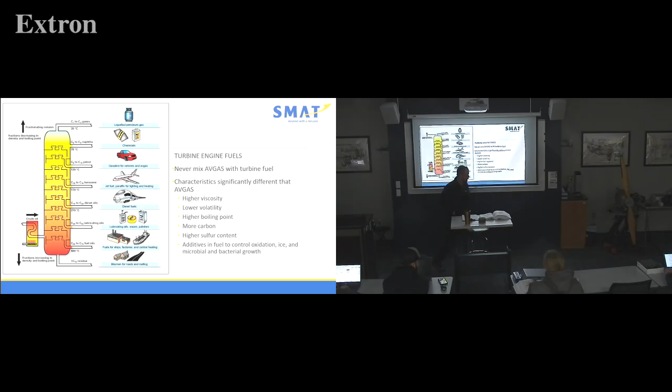We're talking about fuels. Fuels, okay? I showed this chart on Tuesday. That seems like a week ago, doesn't it? Showed this chart. It's in your book on page 14-8. Turbine fuels. Turbine fuel has a higher or lower BTUs than avgas. Higher, per volume. Right, okay. So, when we're looking at this, what's the bottom of the chart?

What's the real key difference here? Volatility. Say what? Volatility. Volatility. Okay, we're getting to a more pure kerosene here. Okay, we have more additives in diesel fuels, that's why it stinks. And then Jet A just smells so sweet, right? So we get Jet A here, and then we're getting to avgas, and then finally unleaded gasoline and other chemicals.

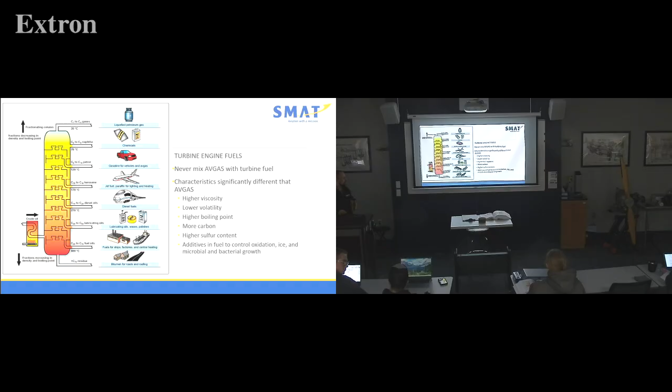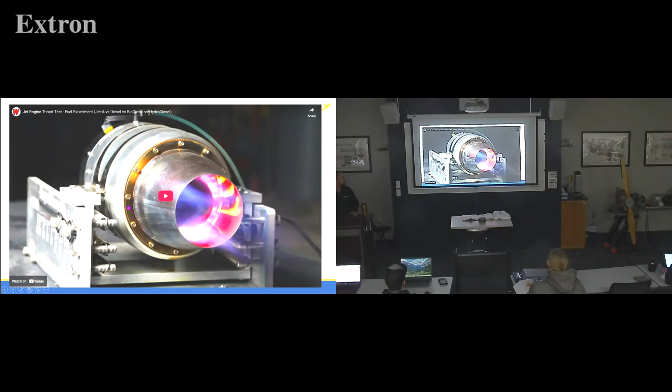All right, let's see what jet fuel does. I really enjoy this video. Oh, we don't get it now. Oh, thank you so much. Sign in to confirm you're not a bot. It's funny, it plays on my computer.

Anybody else not able to access the maintenance publication library today? Not working. I'm gonna access the network. The manuals? Yeah, I can use it today. Okay.

I'm testing this jet engine on 4 different fuels: jet fuel, diesel, biodiesel, and hydrodiesel to see which one makes the most power. I'm using this jet engine in some upcoming episodes and doing some experimentation. This thing sounds absolutely insane, so I had to share my testing with everybody. First thing I have to do: build a jet dyno.

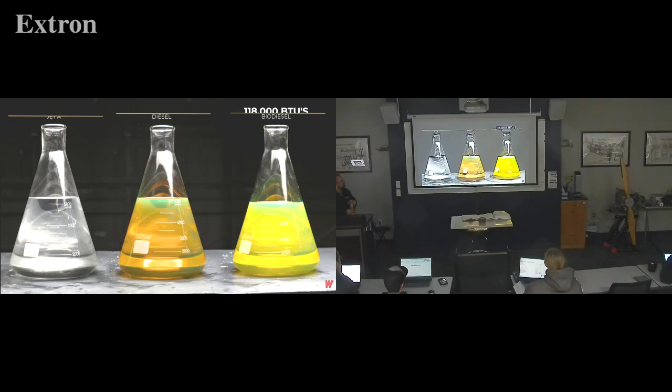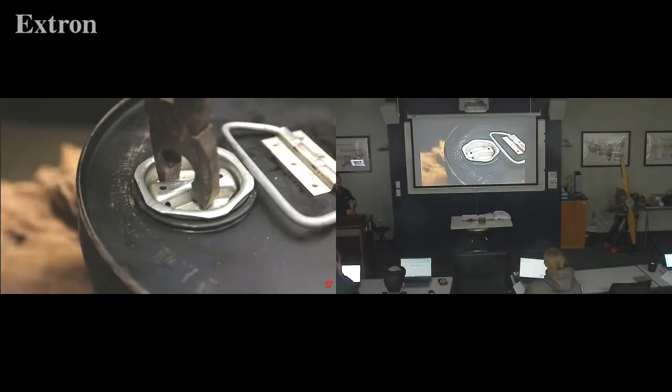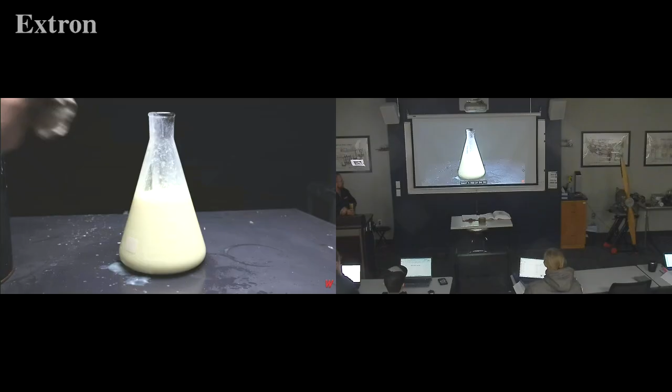Oh no, well, I could have got... there's definitely ice in there. That's really interesting. All right, let me try this again. Here we go, all in. Boom, 5,000 on the dot.

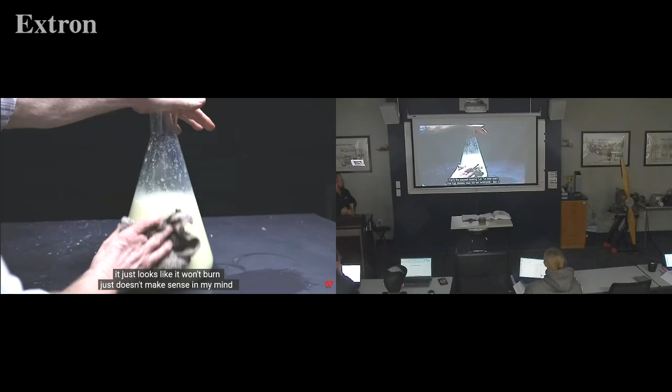That's the coolest looking fuel I've ever seen. This fuel always trips me out whenever I see it. It just looks like it won't burn, just doesn't make sense in my mind. There's actually ice, but I did get the summer version of the diesel. I'm glad I did because now this proves that 20% water... that's really cool. My hydrodiesel has been sitting outside for over a year.

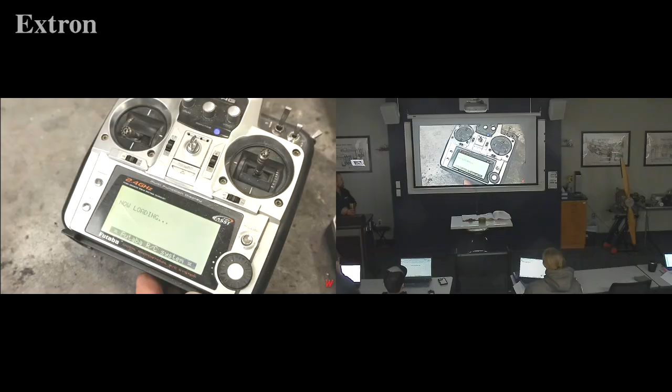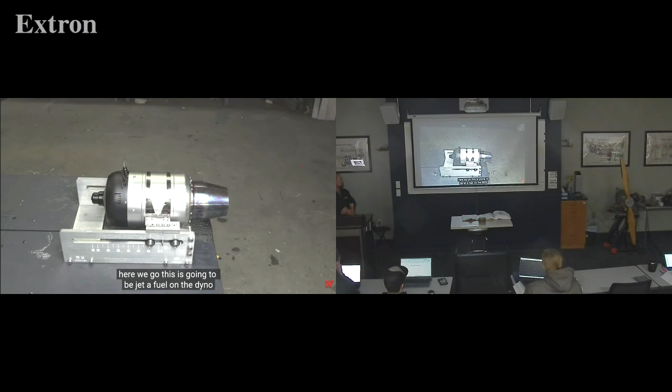I got it all defrosted, got all my fuels set up, ready to go. The only thing I have left to do is add oil to all of my fuels for my turbine. Okay, I got everything all set up: the ECU, the fuel pump, and the jet engine. Here we go. This is going to be Jet A fuel on the dyno.

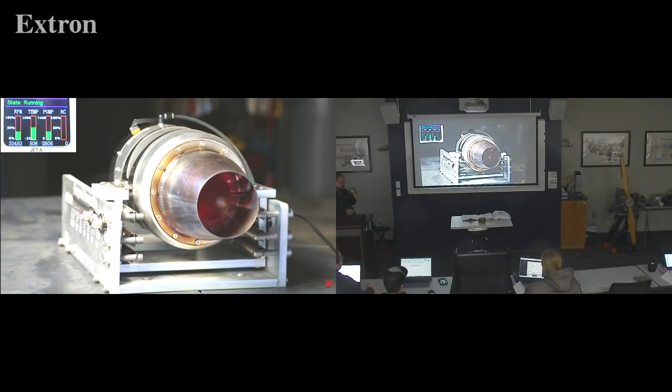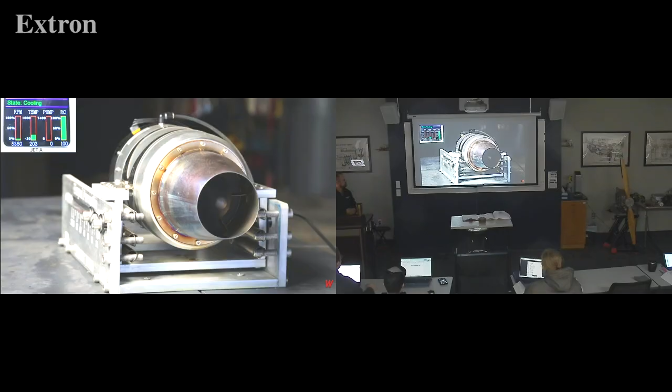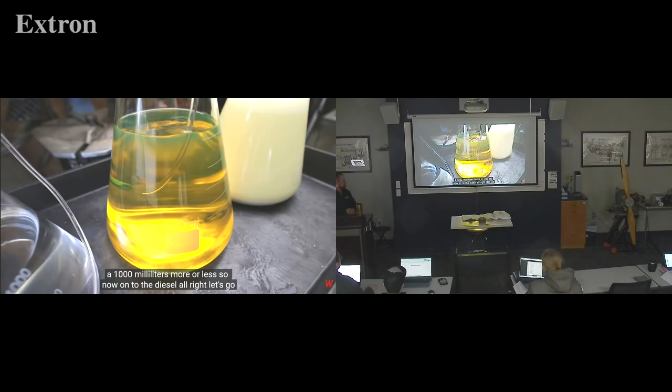All right, so that was it for the jet fuel. It used about 1,000 milliliters, more or less. So now on to the diesel. All right, let's go. Here goes the jet dyno run on diesel fuel this time. Here we go.

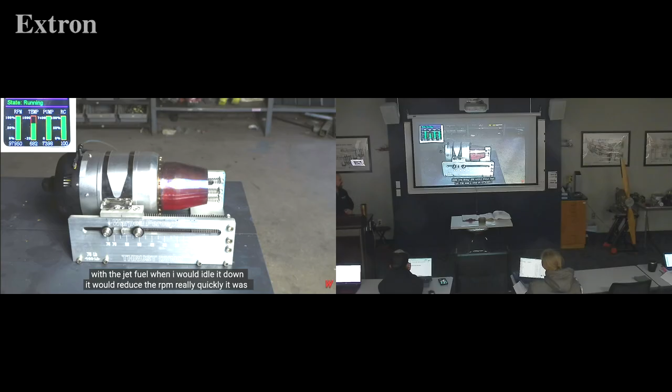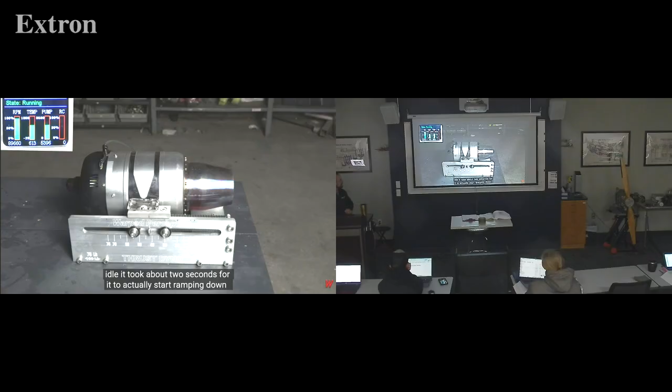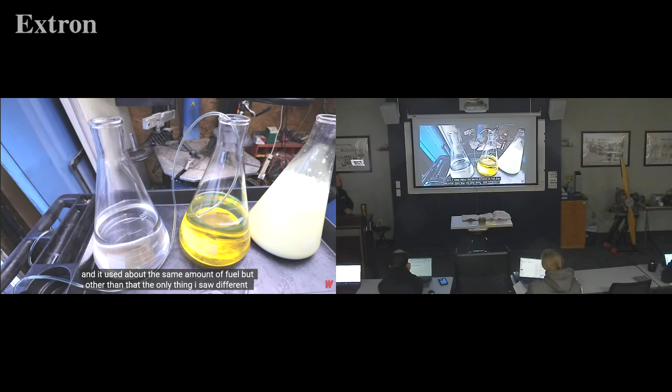Okay, one thing I did notice about that run that was a little bit different: with the jet fuel, when I idled it down, it would reduce the RPM really quickly, pretty responsive. With the diesel fuel, I noticed when I went from full throttle to idle, it took about 2 seconds for it to actually start ramping down. I don't know why that is, maybe the fuel has a different consistency or different energy content. It used about the same amount of fuel, but other than that, the only thing I saw different was how it smelled and looked when I shut the engine off.

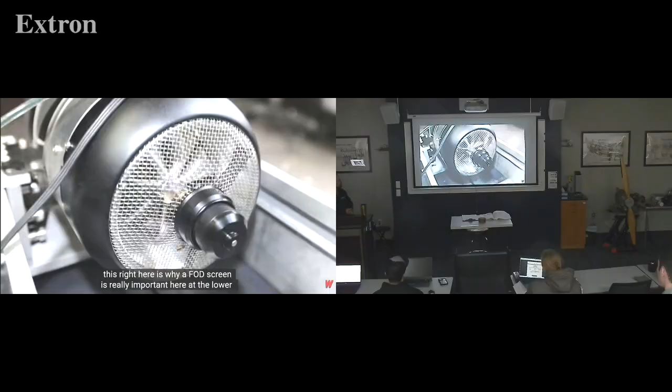Let's move on to the biodiesel. Man, this sucker's heavy, I'm scared I'm gonna drop it. This right here is why a FOD screen is really important at these lower altitudes. Here we go again, this time biodiesel.

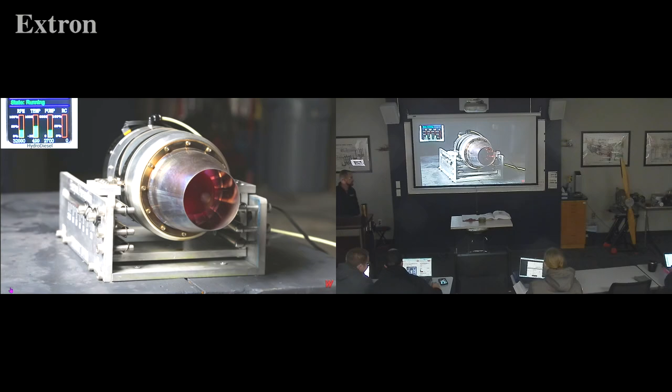All right, takeaways. Takeaways that you had from different types of fuel—as our modern generation, we're obviously always trying to come up with better ways to burn fuel.

Takeaways? More effective ways, yep. What we got works. Well, what did you notice about it? The EJ performed very well. In what ways? As far as thrust. Okay, better thrust? Cooler.

Yeah, it was a lot cooler, even on startups. What does that mean long-term?

So, a recip engine would get roughly 1,700 to 2,200 hours between overhauls. Jet engines are running almost 4,000, with the ability to extend if you have electronic monitoring.

Basically, you're recording data every startup on your temps, and as long as your temps stay below certain numbers, I've seen them go over 5,000 hours—not on an air tractor, but on things like Pilatuses—as long as you can present that your temperatures are staying down.

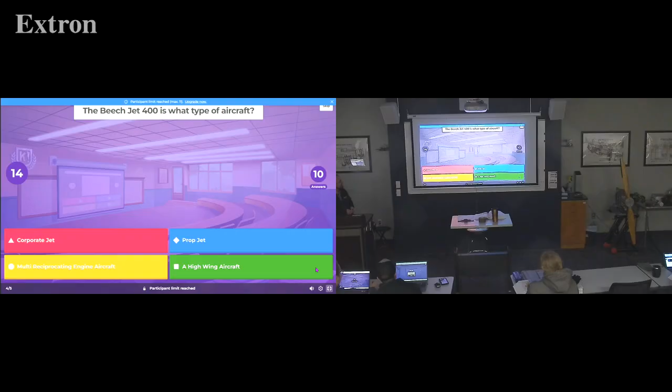Alright, when would someone need to hand prop an aircraft? Not the first one. It's circle. Okay, some of you are like, man, that logic was way off. 400 is what type of aircraft? Okay, hey good job, Christian, back there, really good job on that one. You scared me a second ago. Alright, last question, Carter moved up again.

Alright, last question, everybody ready? Okay, hey sorry, I didn't realize because it's not an actual quiz, it's just a practice, that they only limited us to 10, but we'll fix that for tomorrow. Alright, so let's do the little dance, everybody ready to watch the little, what do they call it, the podium? That's right, podium. Alright, Jedi Master over there, is that you? Jedi, okay good. Alright, T-Swift, still a little weird.

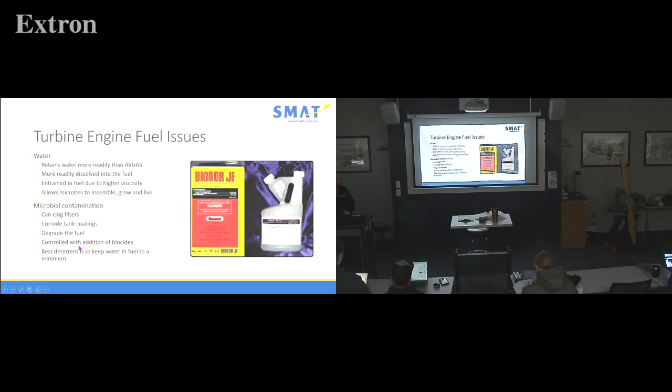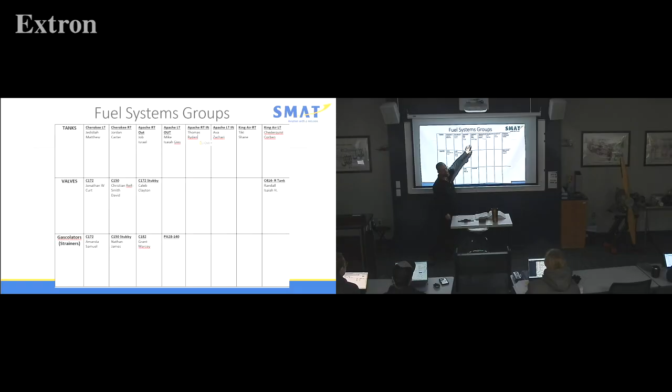Okay, what does that mean? The King Air is going to take the longest. Okay, it's just going to take longer. But I don't have a King Air for everyone to hop in on. Okay, and then I don't have an Apache for everyone to hop in on.

Okay, the way the lab reads is that you just remove a fuel tank, you test it, and reinstall it. Okay, the way that we test fuel tanks is actually in the back of AC 43.13-2B. Anybody ever looked in the back of AC 43.13? You have two sections, 1B and 2B. The back of it will tell you that you're supposed to pressurize a fuel tank to about 2 psi, no more than 2 psi.

Everybody got me? Okay, so what we're going to do is, did I get everybody's name? Did I leave somebody out? Why do I have a blank? I guess I have an extra if one of these groups finish first. That must be what I'm doing here. All right, I'll come back to this group in just a minute, but I need to hop into fuel tank types real quick. All right, everybody got their group?

All right, so let's talk about gravity fuel feed system, or feed fuel system. Gravity feed fuel system tank spaces must be interconnected if the engine is fed from more than one tank at a time. If you're not going to understand some of this, just wait till the pictures. For those of you who are like myself that are visual learners, just hold on for one slide, okay? Just take this in, try to understand it, and then when you see the picture, it'll make more sense.

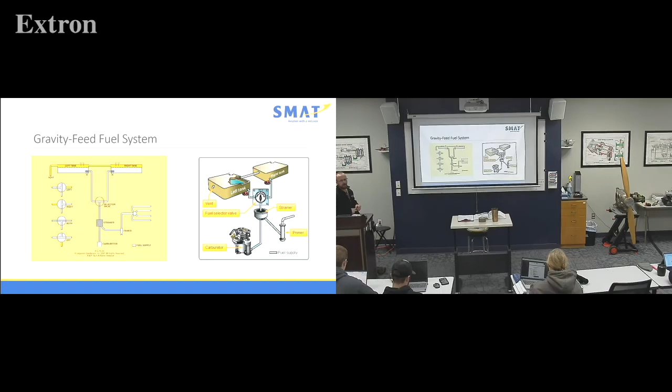Go back one slide. Tanks must be interconnected if engine is fed from more than 1 tank at a time. And that's if they're trying to cross feed a different tank.

So this is for not only multi-engines, like you were saying earlier, but also for when we just select the fuel valve selector to both. Yeah, and I think the good example was the old bird we have outside, the 414, that didn't do that - where they just ran it, you didn't have it interconnected. It was connected from this tank all the way to this tank, so you had to pump it here and then come back, and all of us stand around like, what were they thinking?

In 1971, they said I had to pump it to the tip tank from the locker tank - right behind the engine, the nacelle. Pump it to the tip tank, then pump it from the tip tank to a crossfeed pump all the way over to the right engine. I'm already halfway there, just pump it to the right engine. And that's what they did in 1979 with the 414A.

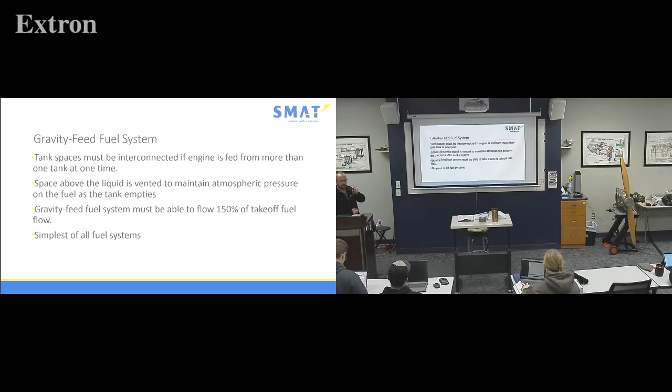I'm failing to understand why the importance of interconnecting the tanks is, like. We'll get there, we'll get taught that. Let's hop in, let's finish fuel feed, and then we'll get to the pump system.

Makes sense, okay? All right, here is our blazing fast Cessna 150. Whoa, Mach speed of what? 90 knots, or 100 if you're going straight down. Okay, so here's our 150.

Pretty common to have a gravity fuel-fed system. So if it was state-of-the-art in 1965, the Cessna 150 was designed to last how many years? 15 is correct, yep, you get the award for today. We'll ask Case to give you a little ice cream voucher or something.

Okay, so the way they originally designed it - if you see these little weird straws on top of the wings, those are actually certified for that aircraft, even though they look like they were built somewhere else. I was going to say Alabama, but...

So the fuel tanks originally had little bitty spouts here, so as you're going through it, it would create pressure into the tank and could vent out that way. Then they were cross-vented here, and then it comes down to a little fuel selector.

The original Cessna 150s only had left or right - there was no 'both' setting like a Piper. So if one tank got plugged, you should switch over to the other. Eventually they came to where you could go to 'both,' but if you get into a 150, don't be surprised to see just a left or a right.

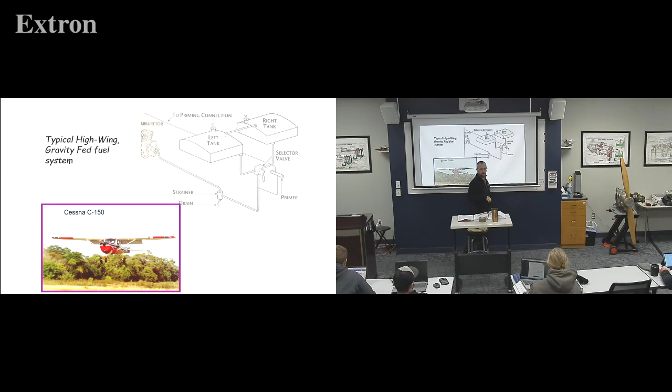We're talking about you, the pilot or mechanic, deciding to turn the fuel selector on and start the engine. Do you know how much fuel's flowing? No. It better flow in order to run, and it's engineered to run at a certain rate, minimum of 150%. All right, I'm stopping there, I'm not going to talk about fuel burn yet.

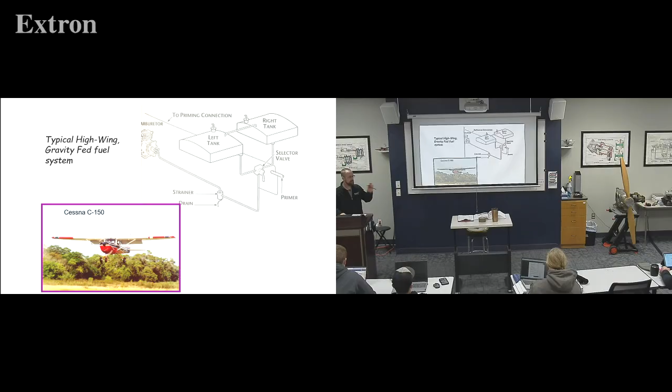Okay, all right, what does it look like on our modern aircraft? Please take a gander at this, okay? You need to pay attention, especially those who are going to be doing labs in my class.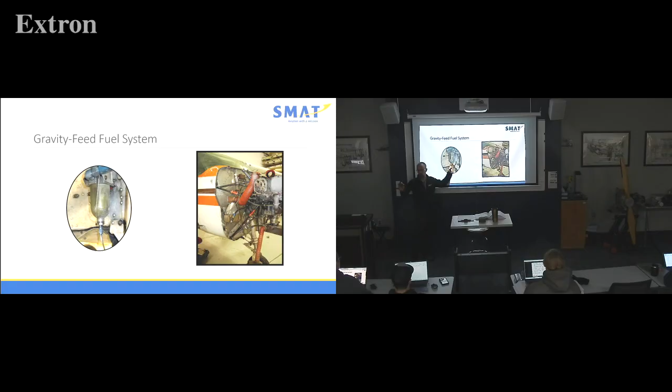Is there a drain on the bowl so we can pull a strainer inside and get fuel out? Yeah, so you want to make sure the fuel selector's off - that's what the service manual will tell you. Make sure fuel's off, then drain the bowl into a little cup - not much fuel anyway. Drain the fuel out, loosen that, and it'll come off. Just make sure the fuel selector is off.

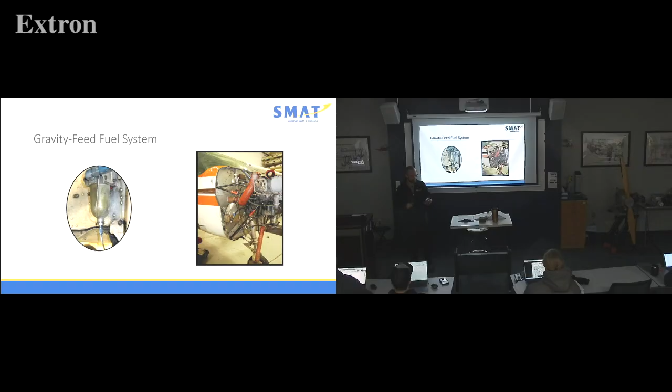All right, pump feed fuel system. So a couple of highlights here - give me an aircraft that has a pump feed fuel system. Piper Cherokee. Any others? Archer, DC-3, Aztec does too, correct? So a very common low wing setup.

Why low wings? You had one? You feel like I shortchanged you? No, I was just entertained by a comment. Oh, okay.

With the high wing, you have the fuel up high and it can go down by gravity. With low wing, the nice ability is someone at my height can fill the fuel system very quickly and inspect it without having to crawl on top of the wing. But now we've got to get the fuel from here up to the engine, so they'll use a pump system.

Typically it'll look more complicated than this on the aircraft, but your wings have the fuel tanks in them. They run to a fuel selector, then down to a strainer - sometimes it'll run to a strainer and then over to the fuel selector. Some of the newer aircraft even have a sump at the fuel selector.

Why would that be such a good practice to add, a good standard? So water doesn't get in there and corrode it - that's right, you don't want it to eat away at your fuel selector. I'm in favor of having a sump at the fuel selector, I like that. So if you're working on an aircraft, does the 172S have that, a sump at the selector?

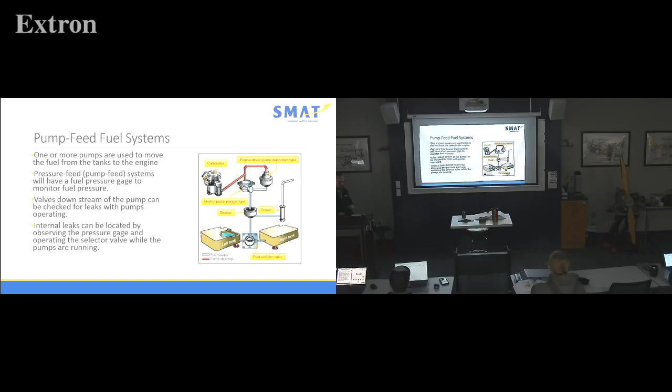All right, this is FAR 23.955, gravity fuel fed or fuel flow rate of gravity fuel system. Main and reserve supply must be 150% of the fuel consumption. If you have your FARs, I don't have the current manual in front of me. I'm curious if this chapter is still in your FAR book. Somebody check me out - if your 2025 or 2026 book has this positive flow rate, this is an older number.

So for a pump-fed system, what's the percentage that the FAA says it needs to have? 125%. Okay, why do they allow a less amount? There's a 25% less chance of it failing. Okay, so what does that look like?

On the 414, each engine burns 32 gallons an hour per engine at full throttle. I need 125% supplied for each engine. So 125% of 32 gallons needs to be able to be available on the pump-fed system through the lines. It means the size of the lines, fuel selector - that's how the aircraft came off the assembly line, with 125% or more.

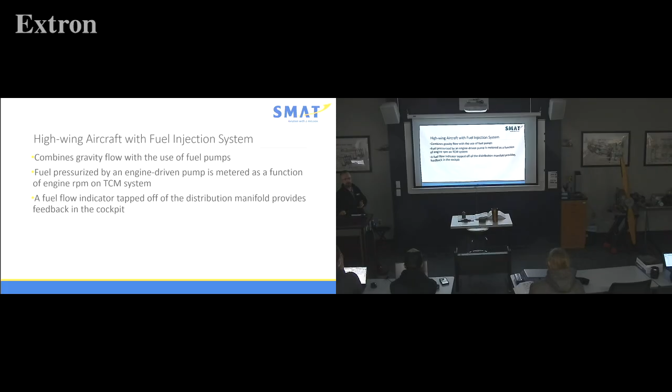I missed what TCM stands for. Teledyne Continental Motors, thank you. Even though they work on engines. I don't know, tomato, tomato, potato, potato. No, it's different - we don't work, they work on engines. It's because they hate us. Actually, I think they were trying a sales pitch, and whoever came up with the slogan or name didn't know the difference between a motor and an engine. But you do, you're a good mechanic.

All right, here it is - this is MAF, ripping some landing gear off 206s here just for good times. All right, I have a high wing with a fuel injection system here. Notice here we have a vent, probably cross-vented, I don't know on this 206, but then we ran to an accumulator tank here, even further down. We have accumulator tanks here. From there, they go to the fuel selector, electric pump.

Can go to strainer, engine-driven fuel pump, and then fuel injection manifold.

Okay, it is a high wing, gravity fuel fed system that is a pump system. Did you go over what an accumulator tank is for? What's the purpose of it?

So the accumulator tank is oftentimes at a lower spot, could be even underneath the cockpit floor, just for variable maneuvers to maintain fuel flow. Sometimes it's high attitude, high attitude landing, you still want fuel flow. It's a good spot to have positive fuel flow, and so it can still pull from that.

The accumulator tanks, not always, but they're usually less than 2 or 3 gallons at a time. Bigger aircraft may have a bigger fuel tank accumulator, but it's usually at a lower portion than the engine, so the engine can pull from it in an unusual attitude.

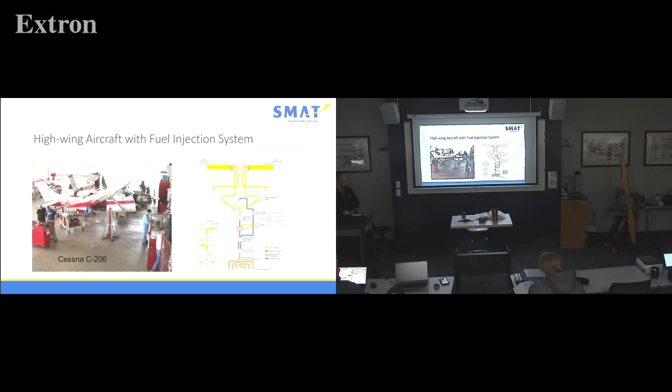Each tank must have 2 vents. This is not always the case, but now it is on a lot of the newer aircraft. Each tank must have 2 vents arranged because if one vent gets plugged, you have a way to still allow the fuel in the tank to equalize with atmospheric conditions.

If Joe takes off from Mount Denali, that's Alaska, and you're flying towards Anchorage. Mount Denali is what, 9,000? Is it 20,000? Is it that high? Okay, so Mount Denali, you're taking off at a high elevation, you're going to land at Anchorage. Anchorage is how high? You're going to have a problem because now you've fueled up, and the flight from Denali to Anchorage may not be that long, it's pretty quick, about an hour and a half or so.

Especially since we're going mostly downhill. All right, so then you take off. If your vents are plugged, what's going to happen to his aircraft? What's going to happen to the fuel tanks, rather? It's going to crumble, they're going to implode. Why are they going to implode? Because he fueled up at a higher density altitude, or the outside atmospheric pressure was lower.

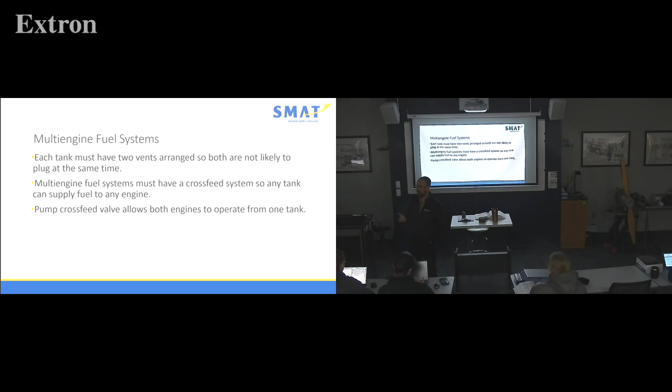Does that make sense? Because you've already read the NTSB reports of fuel vent failures. It's a very serious thing, isn't it? Where a fuel vent gets clogged, and now we couldn't get enough fuel in an unusual attitude. Those of you who are not here, that lab is open.

So is this a blanket rule - both engines, every tank has to have fuel vents? Is that kind of across the board? I can think of several older aircraft that are not, but newer aircraft, yeah, they're going to be multi-vented. And the cross vent wouldn't count - it does count sometimes, depending on where the fuel tank is.

So I think what I'm catching up on is, do all systems have a pump at some point, or not? Not all systems have pumps. The 150 didn't have a pump.

Okay, so then, like Joe was kind of saying, if it's not vented, or vents get clogged, then it's like you're holding the top of a straw - the water's not gonna come out. Yeah, it could act as a siphon, especially on a gravity feed system. If your vents are clogged, it could act as a straw and not allow a gravity system through the gascolator to actually get fuel.

All right, do you have your hand up? Is there a reason we don't just put two separate vents in the cap? You usually want one coming on a different spot, so what Cessna typically does now is they'll do one on the back of the tank and then one on the cap. Piper does the same thing - one at two different areas, so that if one gets clogged from dirt or damaged, the other one won't.

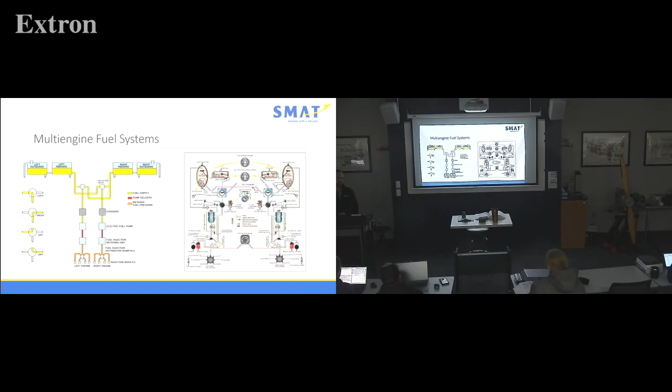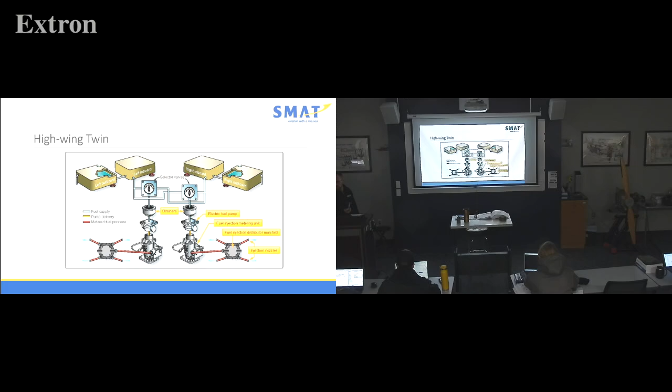All right, indicating, I already covered that. Storage: all tanks can be fueled through one connection. That is on what type though? Hold on. If they're filled through one spot, what's that called? Single point. Man, such a blessing to be able to use single point fueling and defueling.

At some point, you all will defuel aircraft in your aviation career. I'm trying to remember what aircraft it is, maybe it's a B-200 King Air, but I'm not quite sure. We have to fill the tanks, fill the oil reservoir all the way up on the jet engines, and fill all the fuel tanks to do a gross weight analysis, and then to be able to do a useful load check. I don't know if it's every couple years or so, but you have to fill it all the way up.

So what do you do with the fuel when you're done? You gotta drain some of it, you gotta put it somewhere. So you have to drain sometimes hundreds of gallons, or the pilot has to go out and fly it, which they also enjoy too.

Okay, there are multiple configuration options. It's just a nice way for me to say they're hooked up however the manufacturer figured it out. There's no rhyme or reason. Venting must be configured to ensure fuel is vented regardless of the attitude of the aircraft, whatever maneuver.

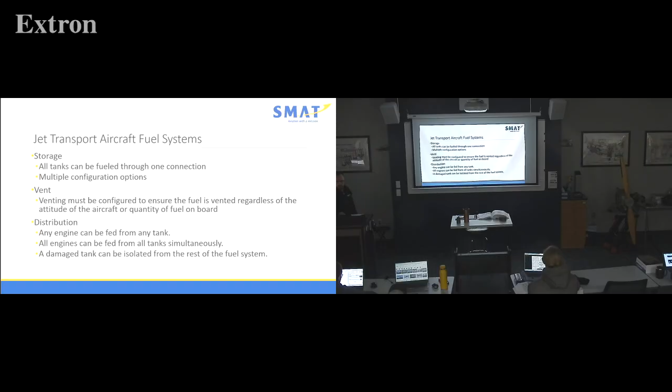A glider. All right. That's a stupid thing, I was calling it a glider. It's the largest glide ever - largest, longest glide.

Expansion tank and turbulent air. Yes, we don't want the fuel to be sloshing over the vents.

We want it to go to a surge tank. A surge tank oftentimes has a galley about like this, and a vent's teeny tiny, about the size of my pinky. But a surge tank will have a galley at the top. So here's my fuel tank. As I'm filling it up, it'll show full about here, and then toward the outboard portion of the wing will be two little galleys. So if it sloshes, it'll go over that and into the surge tank.

Is the surge tank also where fuel will pour out if you overfill, or is that a different system? It goes back to the manufacturer, but oftentimes it will, if you overfill. A lot of times, like the Beechjet, it'll come out the filler head before it comes out the surge tank. So if it's sloshing over to the surge tank, are you losing it? No, it'll actually allow it to come back in. As the fuel comes down, it'll come back into the main tank.

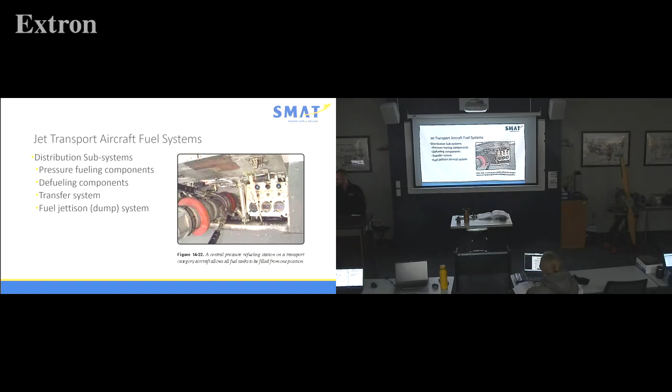All right, kind of already beat this one up a little bit. The fuel system allows engines to run, okay. Always consult manufacturer's manuals for the fuel system.

Thomas, where were your fuel tanks located in your helicopter? Okay, good. On a Bell type helicopter, where are the fuel tanks located? On the Bell, I'm not sure. Sometimes they're right behind you, sometimes right below the engine, sometimes you have auxiliary fuel tanks, even as part of your seats, okay? Even part of the seats.

So typically, you'll have only one or two fuel tanks located near the center of gravity, usually a larger fuel tank. So keep that in mind as well.

Fundamentally, there's little difference between a helicopter fuel system and a fixed wing fuel system, okay? Fundamentally.

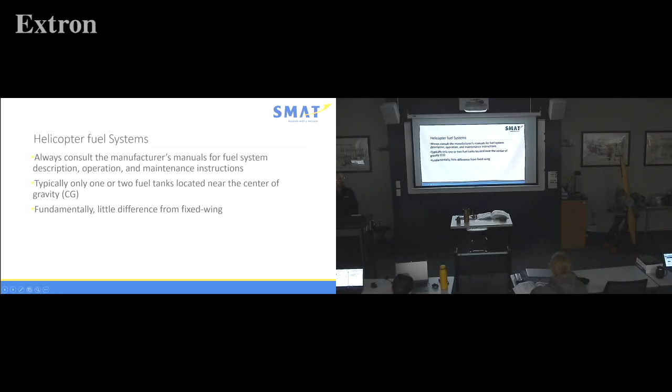But if you look at our Bell 206, we have large 20-gallon fuel tanks underneath the rear bench. They're routed back to the back of the aircraft and then sent up to the Allison engine at the top too, and they're a pump system as well, because your engine's above you, so you need a pump to get it up there. A diaphragm pump? Sometimes diaphragm, sometimes an electronic pump, yeah.

Probably drain those pretty fast, it's 20 gallons. Oh yeah, for sure. Thirsty dogs, yeah.

All right, helicopter fuel system here. You have a giant tank. Here's a better picture of it from a different view that I liked a little better.

You have to get a fuel pump to the top, and then distribute it. Yes, sir, Zachary?

In this case, you don't have a gascolator. They'll have a filter, they'll have a filter. They'll have two different types of filters.

Sometimes a gascolator on the back. I'm trying to think, the Robinson does. The 66s do, the 44 does, of course.

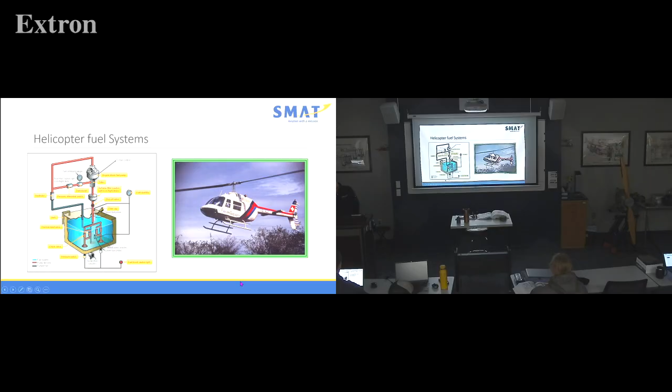All right, rules for the road, last slide. Our main fuel strainer is usually at the lowest point in the fuel system to trap water, okay, that's just standard. If you see a strainer, it's at the lowest portion of a fuel tank or a fuel system.

When I say fuel tank, the Beechjet has one on the belly from the trunk tank, at the lowest point. If there's one on the lowest portion of the wings, or it might be the lowest portion of the fuselage, because there's a fuselage tank as well.

All fuel tanks must be vented to limit pressure differential between the tank and the atmosphere, so it doesn't explode or implode. Fuel system components must be bonded and grounded to drain off static charges.

Okay, today, when you're removing a fuel tank, tomorrow really, today you get started, but I want the aircraft grounded. For what reasons?

Because there's vapor still in the tank or in the fuel system, okay? So make sure the aircraft is grounded or bonded.

I think Case is married to the term bonded, so we'll use the term bonded, okay? All right, fuel system components must be bonded and grounded to drain off. Systems must minimize the risk of fuel vapors igniting from lightning.

So what do we use on our aircraft? Static wicks. And then our tanks are bonded.

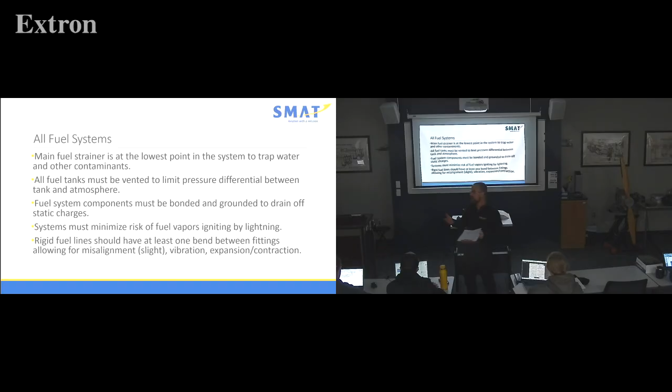When you do a fuel tank, there's also part of the lab - listen to me, read the Moodle lab. Because during removing a fuel tank, you'll have to remove a fuel sump drain, which you're also required to inspect and reinstall. If it's dirty, clean it. Don't get done with it and say, oh man, I didn't inspect the sump - it's not my problem, it's yours. You'll also have to inspect the fuel cap. Read the lab - if you're touching it, inspect it.

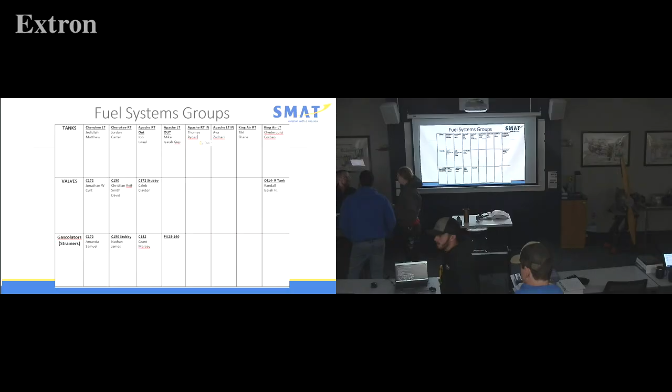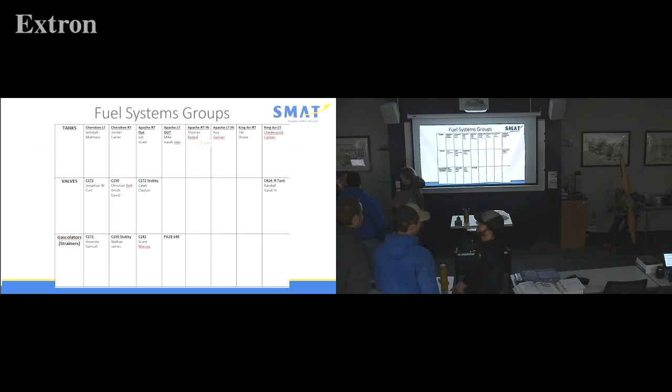You may have to take your shoes, socks, and shoes off. No, you only have one. Do not touch the nacelle tank. Do not, hey, King Air, Cheddar, Corbin, do not touch the nacelle tank. It has fuel.

What tools are you gonna need? How in the world are you gonna get up that high in the air? Like there were 4 interconnected. Let's go.

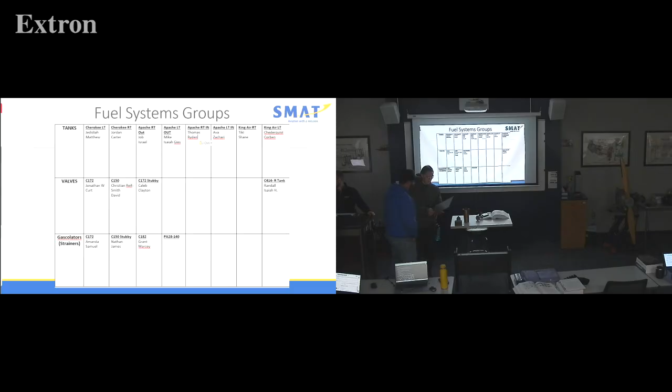Hey guys, if you're gonna miss, this is not the week to miss, because making up a fuel tank really stinks by yourself. Okay, so I'm not gonna penalize somebody because the partner's not here.

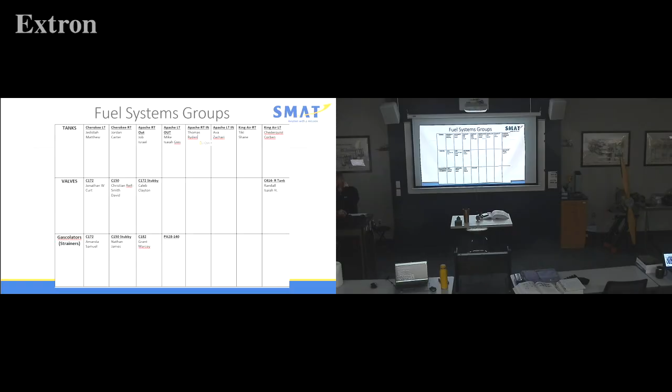Hey, before you get started, you may want to take a real good look at the IPC. Alright, I'll meet you guys. Service manual doesn't have it. It's an, I have a new manual in there. Which one are you in? There's 4 in that, four, right? Are we looking at the IPC or the maintenance manual? Yes. The maintenance manual didn't have very much.

What's up, buddy? I am gonna be missing the 10th and 11th. The 10th was final day. Okay.

What's up, buddy? We're draining the tanks, that's the first step. If there's fuel in it. What are you working on? It's the Cherokee. I assume there's fuel in there. Maybe there's not, but if there is, I gotta ask Nick how he wants to do this. Yeah, okay. I'll go check, we can go look and see how much fuel there even is. Yeah, I assume somebody's gonna need to drain. You're gonna have to drain fuel, yeah. Right, because if there's just a little bit, then we're not worried about it. Right, but now we're in a dilemma where we can't put all the...